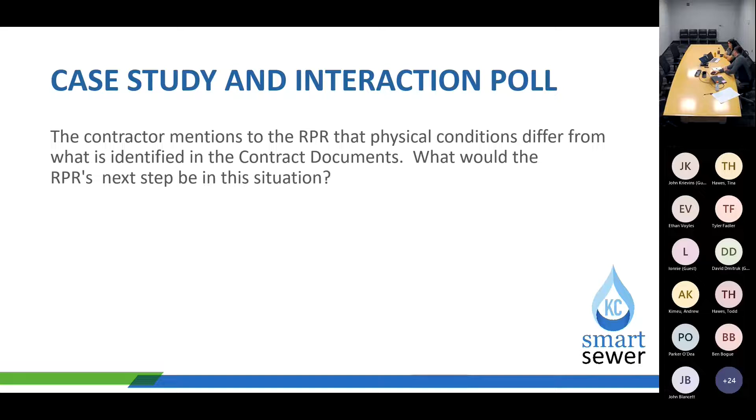Okay, so with that, we'll get into some further discussion of additional scope work and tracking of time and materials.

So as we discussed with those two last questions, it is important to identify, notify, and document. So identify a potential change, have those discussions with the contractor. And like we stated, notify the project managers that there is a potential for a change. And then I think it was Tim who had stated document: go ahead and make good documentation within your daily report of those discussions and the situation that's taken shape.

So you just want to follow up with the PMs and outline your discussions with the contractor and what the path going forward is going to be, and let them weigh in, as that could impact the means of payment, if it's going to be like an allowance authorization, work change directive cost not to exceed, or potential change order.

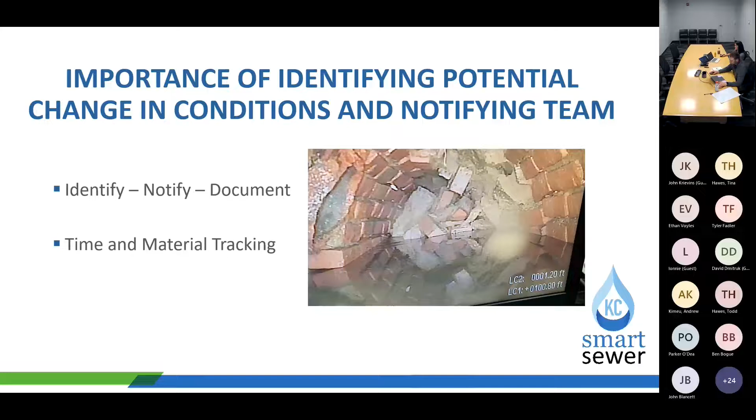So as we touched on, facilitate effective communication. RPRs are the first line of defense, and they're very vital, getting ahead of issues and limiting any possible delay. Keep a good paper trail, sequence of events, report the details that are discussed within your daily report. As you all know, we've touched on that in class 3.

And then risk management limits the exposure to potential loss. The better the information and the better the situation's managed, it limits the potential for delays or exposure for cost impacts. Also identify who, what, when, and where. That's in the case of a T&M type situation, which we'll touch on further in the next slide.

And then, record retention. Just keep in mind that everything that you're including in your daily reports could be used for potential backup within the change document, or if these records are needed to be recalled later on in the future, particular details, there's a possibility of that as well.

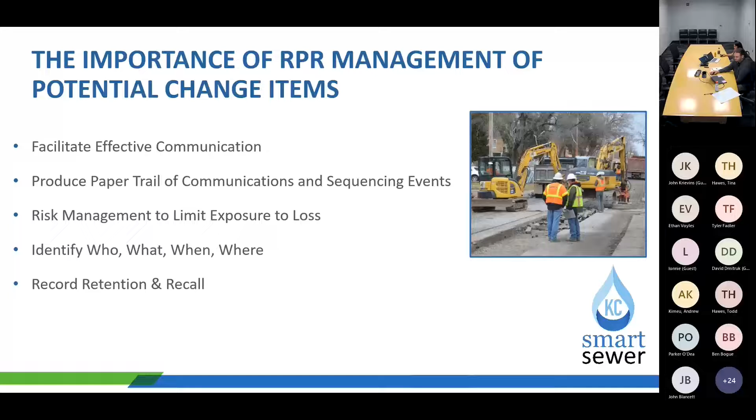So as we get into time and material work, this is work performed for the owner which was not covered in the original unit prices or schedule of values. It's important to understand the scope of work and how it differs from the base scope, the original work. Typically, this work is not agreed on a lump sum price, possibly a cost not to exceed, and then tracking as time and materials.

And with time and materials, the contractor is paid off of the actual costs and direct labor specified within their hourly rates, and also the actual cost of the materials and equipment used, covering basically the portion of work that's completed, as well as their overhead and profit within time and materials.

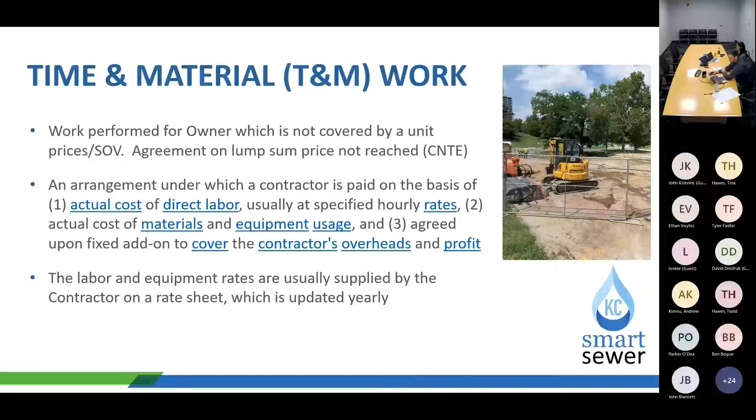So as they bill these items, you can take their extra work tickets and compare them to the contractor rate sheets, which they are to supply yearly. So it's always good to go ahead and get those sheets, ask for them at the beginning of the project, just in case you do have a time and material situation that pops up during construction.

So you would take these extra work tickets, compare the hours billed to what you've tracked, and then compare the rates to the contractor's rate sheets. And it's also important to track the materials delivered and any subcontractor support for the T&M. So keep that in mind as well. Don't wait till the end to try to gather all the material tickets. It could be a situation where you're having to backtrack.

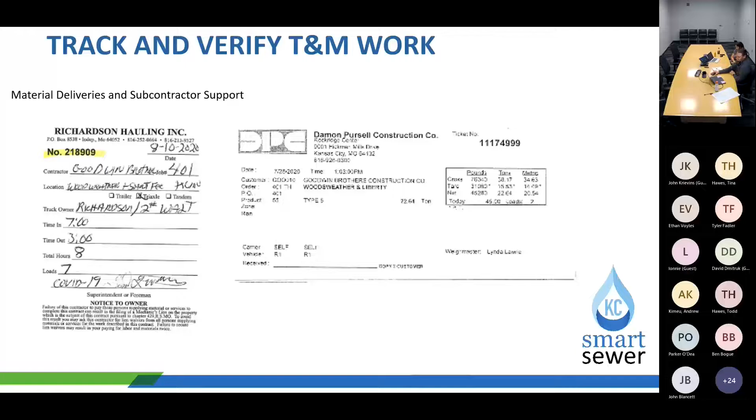This slide here is an example of labor and equipment rate sheets. Again, the prices are blacked out here, but you can see it goes through each craft and then would specify the rate for each craft. And same with the equipment.

So at the end of the day, you would basically refer back to your daily report where you're tracking all the equipment and labor and materials used, sitting down, flipping through the extra work tickets, and falling back on the labor and equipment rate sheets to verify. And it's also important as you go through the work tickets and review them, if you agree, go ahead and sign the work tickets, as these will be compiled and used for backup for the change document.

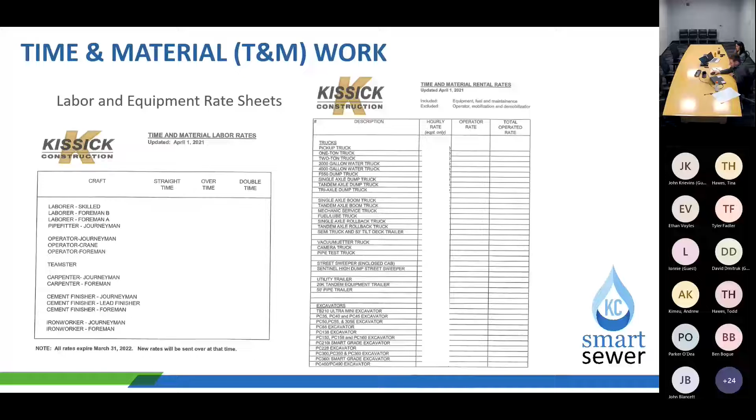Are we going to know when we're working on a time and material change order, or is that just going to be, you're kind of figuring that out in the field, or how do we get notified that this is T&M work?

So that would be within your discussion with the contractor, and that's part of the purpose of identifying situations that look different and having those conversations out there in the field. And again, if they feel that there is a change, they need to basically submit that in writing. And you can initially obviously make a call to the project manager that this situation's occurring,

but that's how it gets started. We want to avoid situations where the contractor proceeds with work and then after the fact they're coming back and trying to bill for a time and material or extra work situation. But Tom, all of that needs to be priorly approved. It's not something that's just approved in the field. The project manager has to be aware. The design professional, project manager, they all need to be in agreement with the project team.

Well, funds have to be procured and also awarded to that contractor before work gets going too. Correct. Yeah, everything needs to be priorly approved beforehand. So just make sure that the project team knows that one of these situations is going on before that work gets started. It can all get documented.

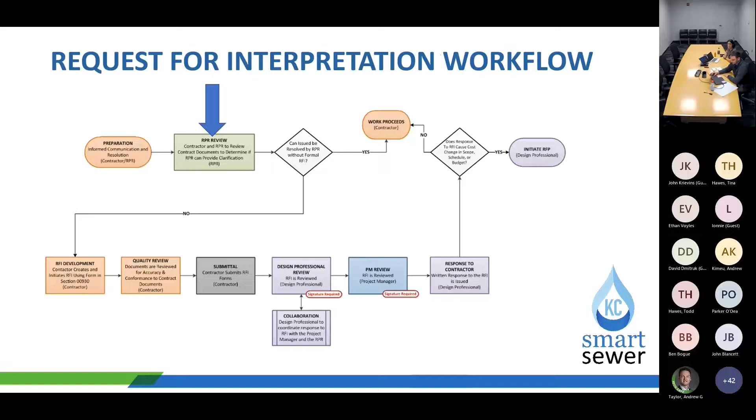So on that note, requests for proposals. This is where the DP will put together the RFP with information provided via that RFI and with the RPR and conversations with the contractor. It's our formal request to get pricing from the contractor. So, the RPR has input on what this can look like, whether we think it needs to be a lump sum bid or a time and material request from the contractor.

The input from you guys is going to be important and should be taken into consideration by the design professional. You guys are going to be the ones responsible for watching and keeping an eye on these changes as they happen in the field. So if you guys feel it can be tracked appropriately, T&M, we can go that route, or if you feel it makes more sense to go lump sum, voice your opinion. Hopefully the project team is listening.

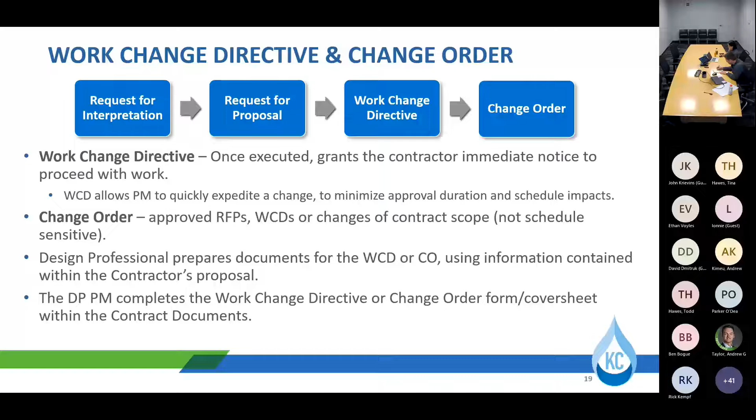So work change directives. Again, these are used often when things come up that are going to affect the critical path, have time constraints, or getting a lot of information on that full negotiation process with RFPs can become unreasonable in terms of time. So contractors digging out in the field, they come across something; in order to keep working and get those roads back open, we can issue a work change directive, which is their authorization to move forward through the issue. And then we follow that back up with the next steps in this process.

The big one on this one is if a work change directive is issued, there needs to be a lot of follow-up between the RPR and the project manager and the design professional to get through RFPs and a full change order expeditiously so that this isn't just hanging out there as an open item.

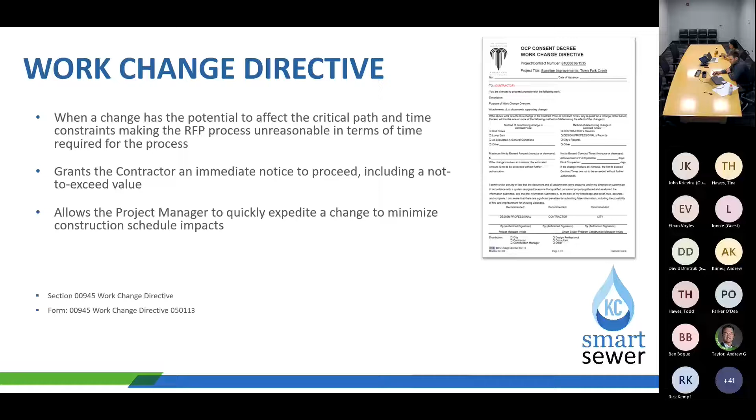Change orders. This is the official vehicle that we can use, the mechanism within the contracts to allow us to modify it. So this allows us to modify times, costs, schedule, all those things. So once we've collected and gotten the RFPs, work change directives, all that stuff's been worked out, and we have our final resolutions on pricing and time, the design professional and project manager work together to issue and execute that change order. There's some QA processes that this rolls through to make sure all the information is correct, but that's the last step in this process.

Yeah, a lot of times you'll have potentially a series of work change directives. It's important to note as an RPR that if you're reviewing a payment application, the contractor cannot bill for a work change directive without it being included on an executed change order. So keep that in mind. That's where that expeditious next step comes into place, because most of these guys do want to get paid. So if we issue that work change directive, it's good to follow it up with the change order as quickly as possible. Yep.

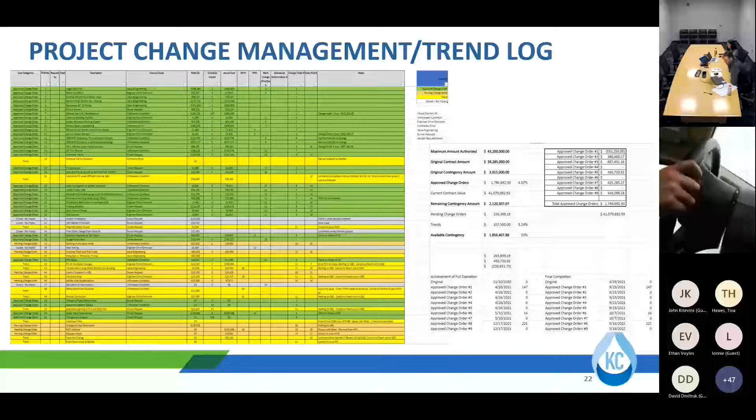So that change log actually translates to the KC Water Smart Sewer dashboard. So again, that's just another example of why keeping that updated is important, and keeping them in the loop of these potential trends. We're calling trends potential change items. And then providing a ROM of these potential trends or change items.

So as these situations occur, keep in mind too, don't let these items linger, like we talked about a bit ago. Push for a resolution or have these discussions with the contractor to submit something in writing to help get a resolution, and then actively coordinate with your project team or Smart Sewer PM as these come up.

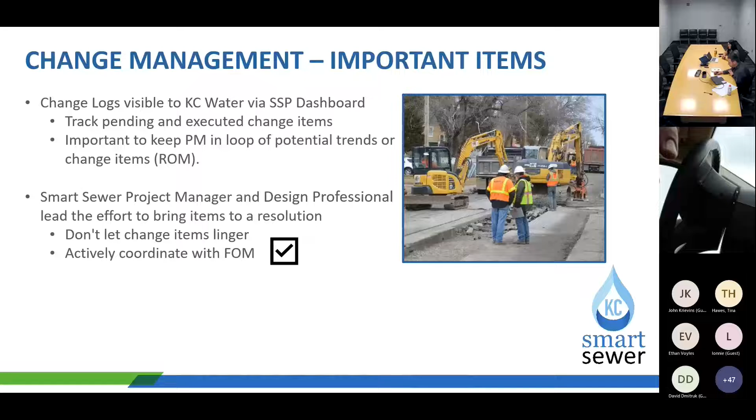So with that, we'll talk a little bit about project getting to substantial completion, or AFO. So first off, achievement of full operation is when the contractor considers the entire work ready for its intended use. So the outline here is the contractor, once they feel that the project has met substantial completion, they will submit in writing to the design professional of such. This is outlined in the supplementary conditions.

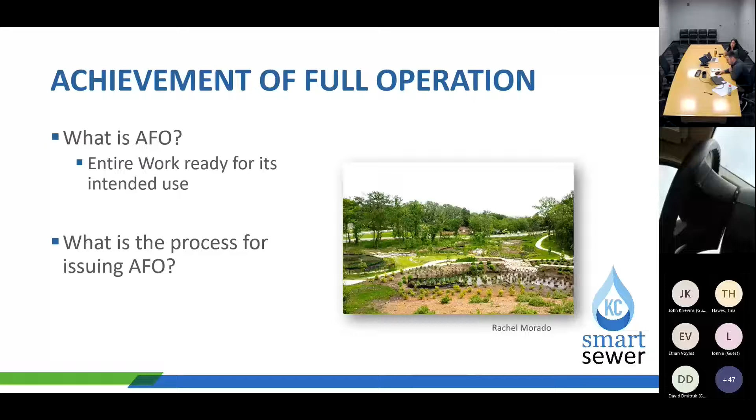So, I would remind, we've had some situations where the contractors needed to be reminded to go ahead and submit for substantial completion in writing. So keep that in mind as your projects are trending towards AFO. Also with AFO, make sure that you're receiving all the post CCTV review, as well as verification testing, and that documentation being archived. So obviously for linear projects, it's important to keep up with your post CCTV review. As we hit on in a couple of the prior classes, this is a requirement for monthly payment. So keep that in mind as well.

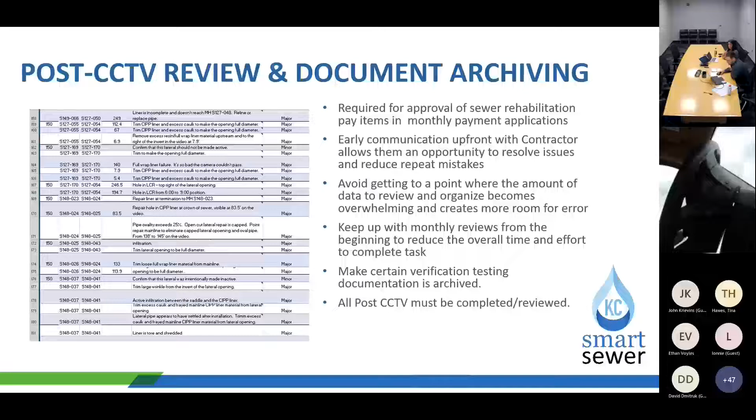And then as you trend towards substantial completion, you'll need to have all the post CCTV reviewed, and this will help you obviously generate your substantial completion punch list as well. So another important item is for each project, look in the supplementary conditions as it outlines the requirements that are to be met for substantial completion. It can be found in paragraph 14.04 of Article 14. It'll basically provide some bullet points on the overview of the items needed to be completed for the project to be considered substantially complete.

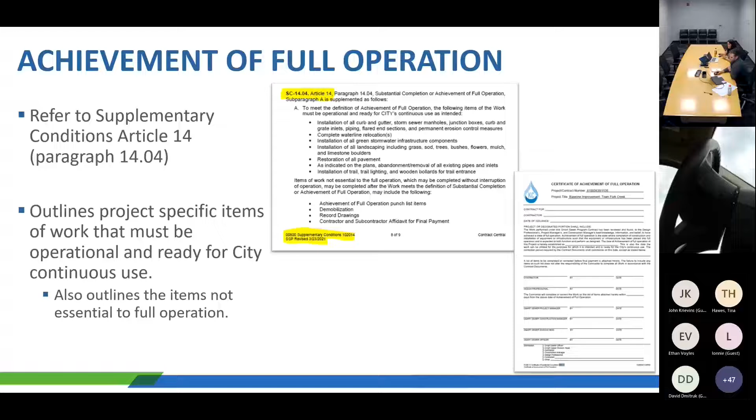Once this process has happened, the DP and city will review the substantial completion request. If they agree, they'll go ahead and proceed with the AFO certificate. There's a snippet of the certificate there on the bottom right. It's important to go ahead and have your punch list generated at this time or shortly after the substantial walkthrough, and that it's included in the correspondence of this AFO certificate.

So with the substantial completion walkthrough, this will happen after the contractor's request. The project team will schedule a walkthrough with the DP, yourself, the RPR, the contractor, and city FOM or city representative, and they will outline a map or items to basically walk the site. And they should have a representative sample of each work type.

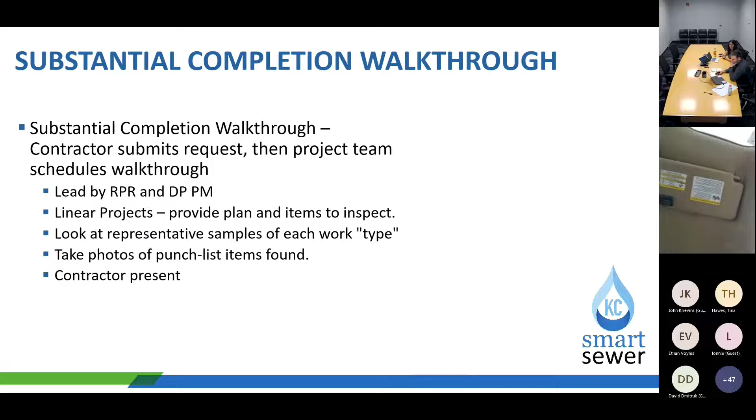So if you think of your different project types, let's say an I&I job, for instance, you'd want to lay out a schedule of checking a few manholes that have been cementitious lined, some areas where total line replacements occurred, look at a couple back easement areas where restorations occurred or casting replacements. So you just want to get a good sample of each different work type with these walkthroughs. And then during your walkthrough, go ahead and take photos of the additional punch list items that you find. That's important as well. So if you'd like, I can provide an example of a typical walkthrough layout as far as how these are generated for linear projects.

So as you come upon substantial completion, a couple takeaways here: just make sure that you're keeping up with punch list items. These are to be completed in order for the contractor to meet final completion. So if it's you yourself that's verifying completion, just keep that communication with the contractor on when they're planning on completing these items, and verify as they're completed, as you'll need to sign off within the punch list.

It's also important, throughout the project, that you keep a rolling punch list. You can provide this as you progress through the project so that when you get closer to substantial completion, you don't have this long drawn out 100-item punch list that all of a sudden the contractor needs to take care of in the 60 or 90 days, whichever's in their contract, to reach final completion. So keep that in mind as well.

You also don't want to send them a punch list at substantial completion, and then a week or two after the walkthrough, you notice several other items, and you're just constantly updating the punch list. You want to have a good, comprehensive punch list at the time that you're submitting that over to the contractor.

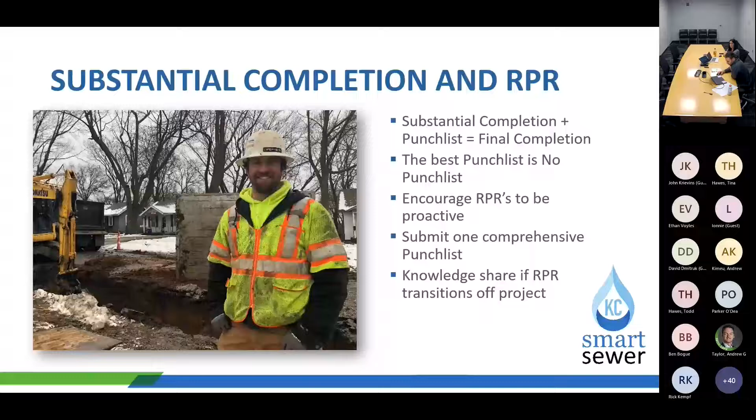With that, Tina Hawes will talk a little bit about post-construction photos and some other items as the project trends towards final completion. Okay, so the post-construction photos, these can actually be turned in after the substantial completion punch list, or kind of go with that punch list. And then these have to all be submitted. These types of documents, as in the post-construction photos and the videos, all need to be done before the final payment.

Usually those are collected as the as-builts are getting turned in, and also look through them, review them. If there's something that stands out, like the photo needed to be taken after the restoration was done, or if the photo was taken too early and it wasn't restored correctly, just make sure that gets restored, and then that photo gets retaken and submitted as well.

So just making sure, the specification, if you need more detail, it is presented in the 1015, and that's the supplemental conditions. Keep in mind too, as they're submitted, we'll want to go ahead and archive these on eBuilder as well. And normally they're done through a USB, and that also gets archived with the project folder.

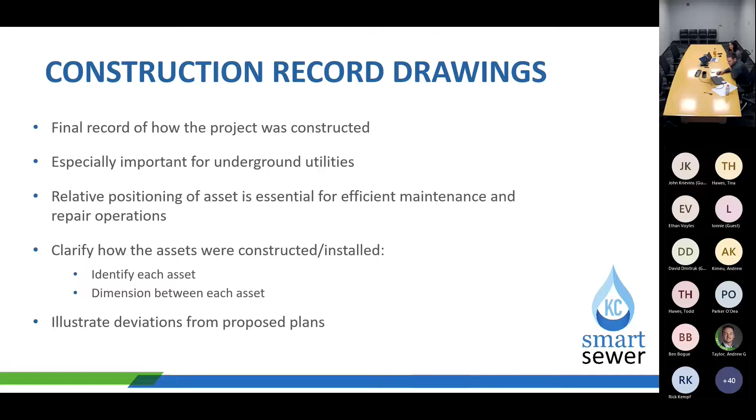So again, just make sure that as the project proceeds, the contractor is keeping their as-builts updated. The RPR should also have a working set of as-builts as well, or a tracking spreadsheet if it's a linear project, keeping track of any changes from the rehab schedule. Once the project's completed, the contractor should deliver their as-builts to the DP, and like we said, the DP will use this information to compare their records and finalize the final set for the record drawing package, which will be submitted to Water Services.